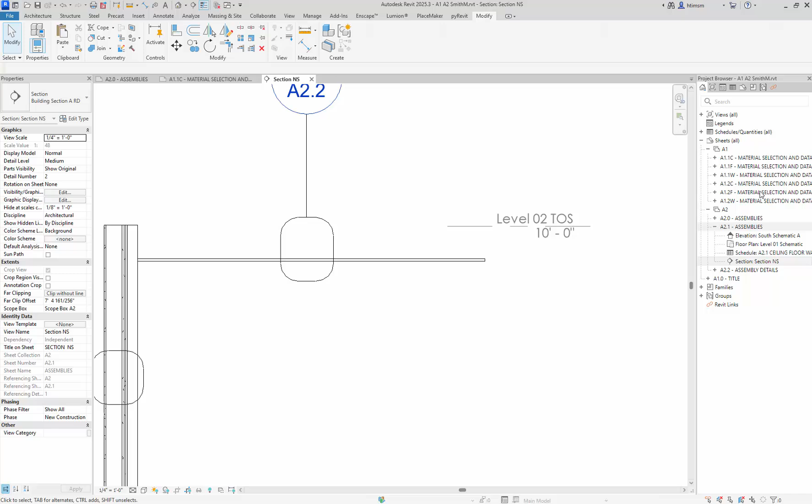All right, so the next thing I want to do is make the ceiling assembly. Just to refresh your memory from the last video, this is the one we're going to make. So basically I'm going to make this part of it here. It's going to be the 2.5-inch concrete suspended on metal deck, and the ceiling actually suspends below that. So that's what we're going to use.

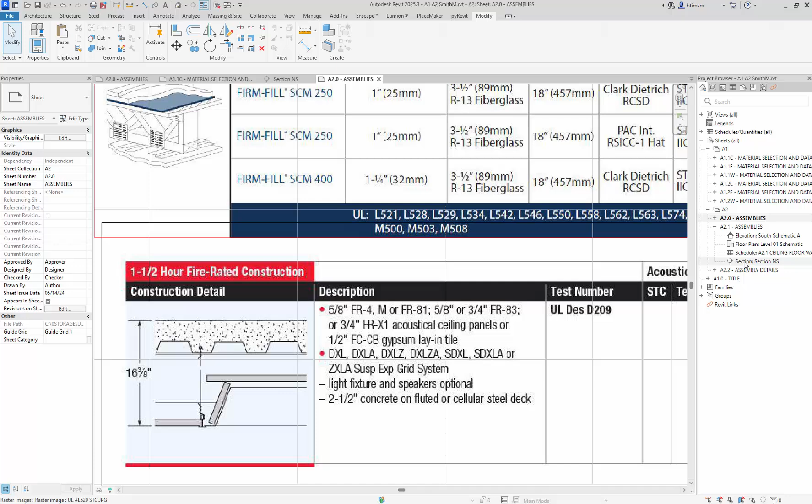All right, so if I go ahead and go back to my section here, I can pick this ceiling, but it's actually a ceiling, and I don't want a ceiling, I want a floor. So if I pick this, it's actually a floor. So I can kind of start from this one.

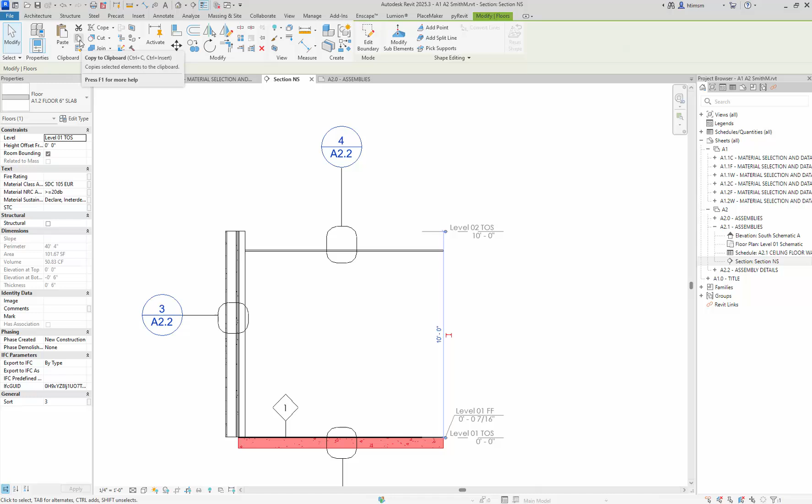And so if I pick that one, I can copy that, just copy it to my clipboard. And then I can paste align to selected levels, level 2, top of slab. Now it's pasted that right to the top of slab, and I can go in, and this is different than that one, right?

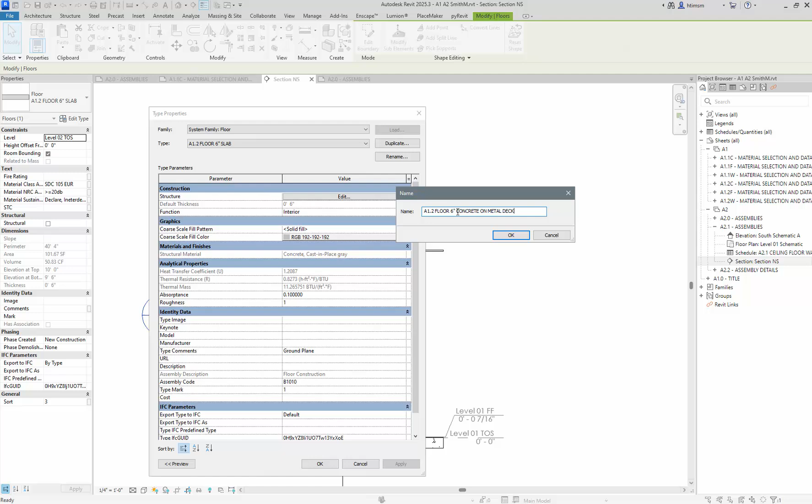So I'm going to edit type, and I'm going to duplicate this, and we'll name this - I'm not sure how deep it's going to be, but we'll name it concrete on metal deck. I don't quite know how big it is, I might rename it, but I don't want anything wrong in there. So I'll click OK.

And then I'm going to edit the structure. And it says it's 2.5 inches, and that is actually the depth of the concrete before it gets to the metal deck. So we've got 6 inches of concrete here, but let's go ahead and put the metal deck in.

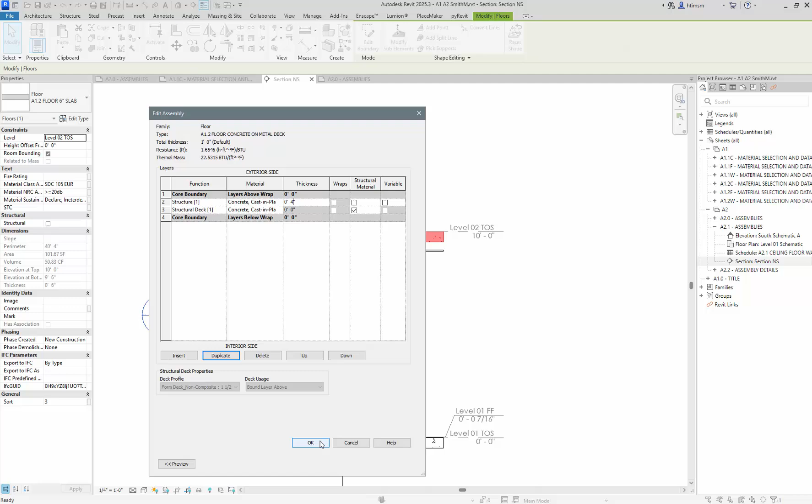So I'm going to come in here and duplicate that. And if I go to the pull down, you'll see that there's an option for structural deck, and I'll pick that, and it's going to give me 1.5 inches of non-composite structural deck below that. So what I want to do is make sure that the 1.5 inches and add that 2.5 inches to it, so that would be 4 inches. So I do 4 inches and then click OK and click OK.

So now I've got this metal deck that's sitting right there on the level 2 top of slab. Okay, so far so good.

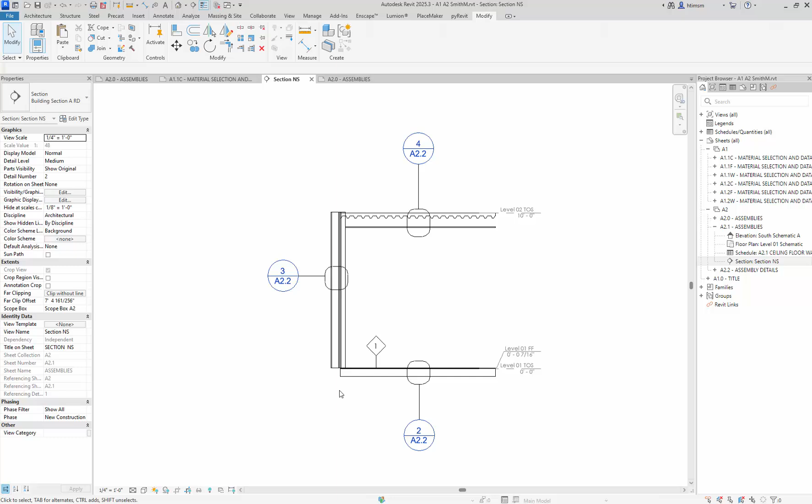The next thing that we want to do is figure out, like this is kind of an interesting intersection, right? Like the floor doesn't go all the way through, and the floor here doesn't go all the way through. So typically what would happen if this is a partition, this is a 1 hour firewall, this would go all the way up to the bottom of the deck. And then this is our finish, and it's kind of these panels, so it needs to be adjusted.

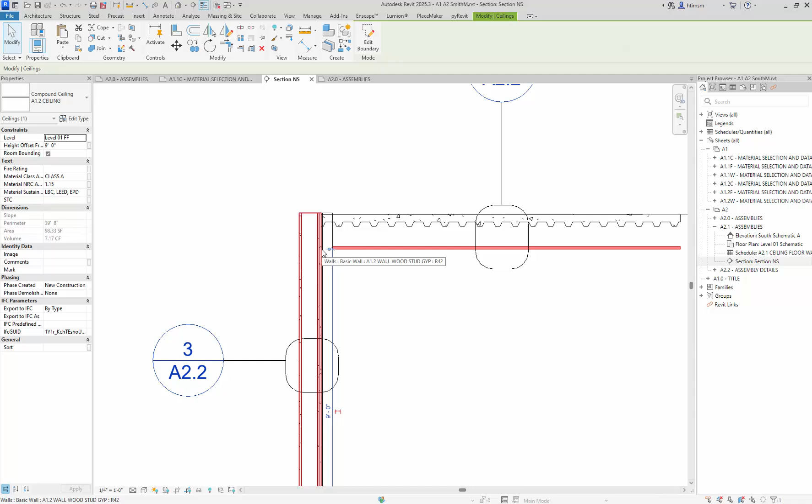The ceiling would typically go all the way to the edge. It would have a little corner piece or a little offset piece here, depending on how you handled that. And then the carpet would go to the edge of the chipboard and have some trim over it. There might be some little rails that run along that hold the carpet in.

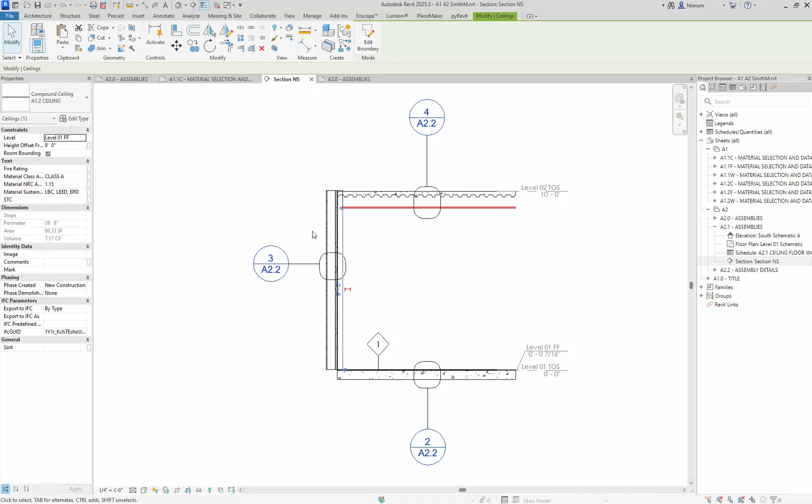So what I want to do in the next video is go in and adjust all of these things so they look correct, because this is not the way that these things meet. And that's important to sort of have an understanding of how that works.